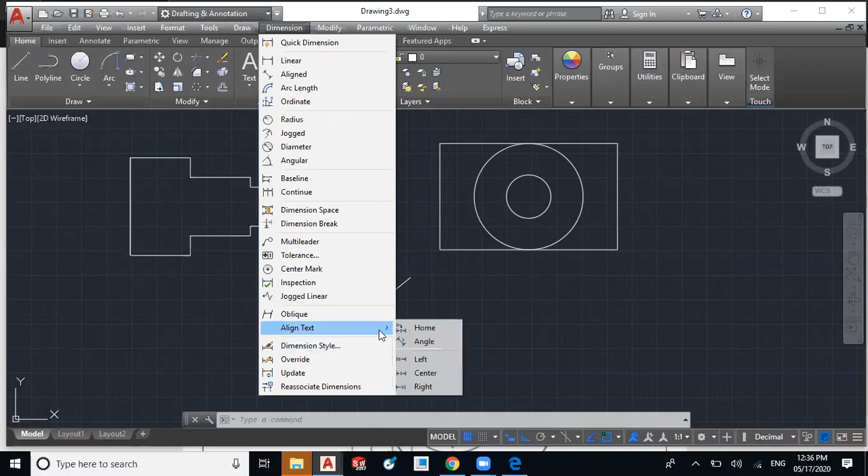You can directly jump to another scale, like you cannot start from 0, but you can start from 10, 20, like that. That is the jog. It is jog in the linear and jog in the circular dimension. Two options are there. Then oblique dimension is there, and then align text is there. You can use home method. You can give align text at angle, left, center, and right. These are the aligning methods for the dimension text.

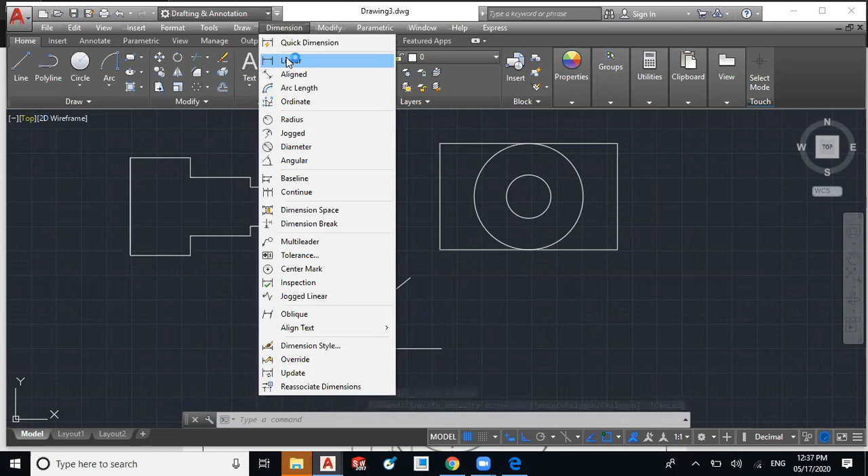There is the dimension style option, which is used to edit the dimensions or edit the style of the dimension. So we'll see that afterward. First, we'll select the linear dimension. To give the straight line dimension, we use linear dimension. So select the linear. Then we have to select the first point of the line, then end point of that line. We have to drag out at the specific distance and left click. So we have given the dimension to the first edge of that rectangle.

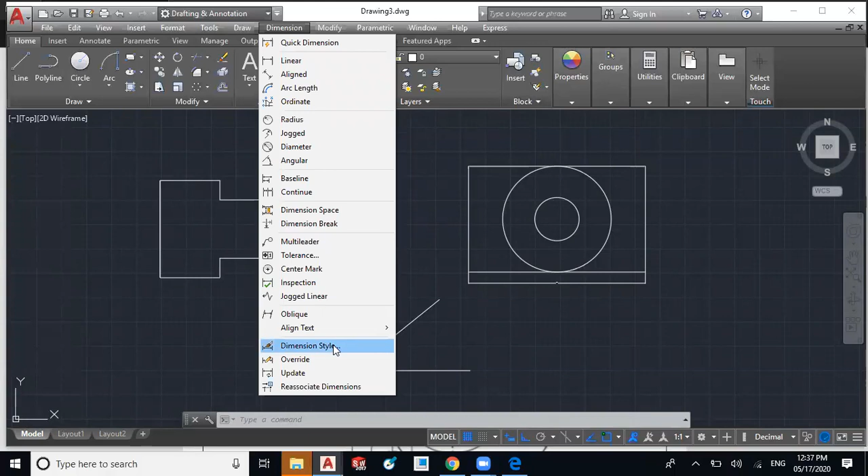Now you can see there is small dimension. You can see text height is very small. So we have to change this text height. Before giving other dimension, we will change this. So we have to select the dimension again, and we have to select the dimension style option. Okay, then dimension style manager window will be open. To open this window, we are having shortcut, that is DS.

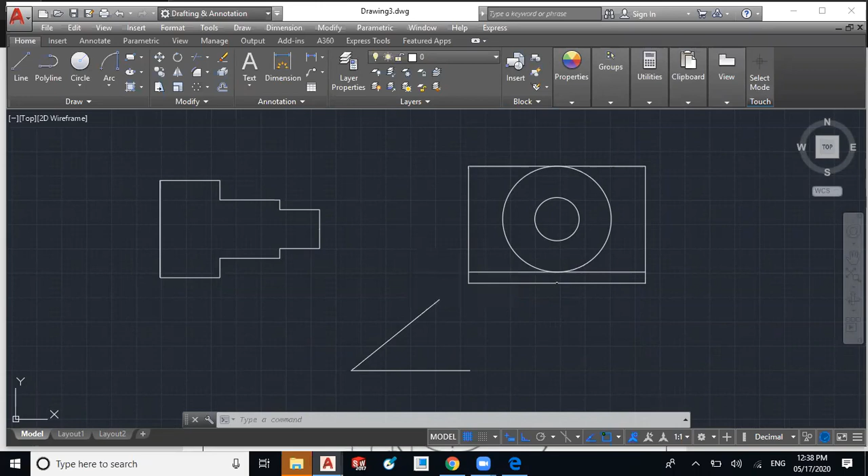Just we have to type the DS, and you will get the option dimension style. So select it and open it. Okay, so you will get the dimension style manager. Sorry, DST is the shortcut for it, and DS for drafting settings. You can type dimstyle. Dimstyle is the shortcut for it. So you have to use the dimstyle shortcut, press enter, then okay, dimstyle, and you will get the dimension style manager.

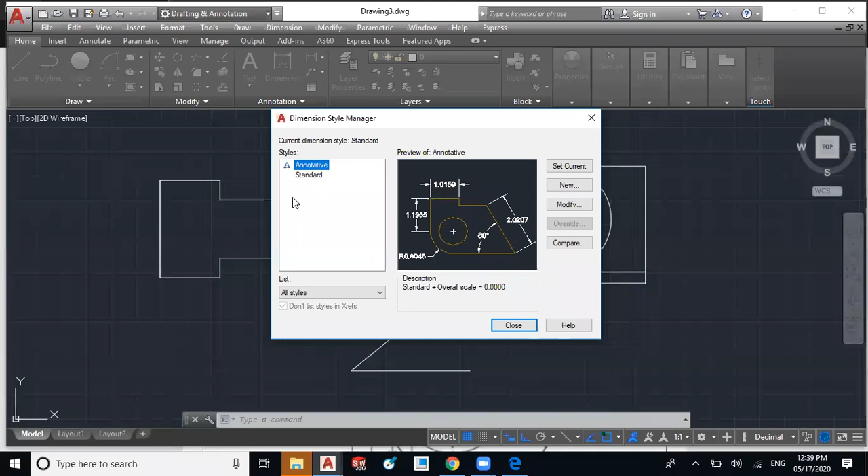And from it you have to select the standard option, or you can select the annotative also. So dimension will be annotative. For that you have to select the annotative option. So we are using standard dimension here. So I will select this standard, and I'll select the modify option to make the changes in the settings. So there is the modify dimension style standard dialog box, and we are having these tabs: lines, symbols, text, fit, primary units, alternate units, and tolerances.

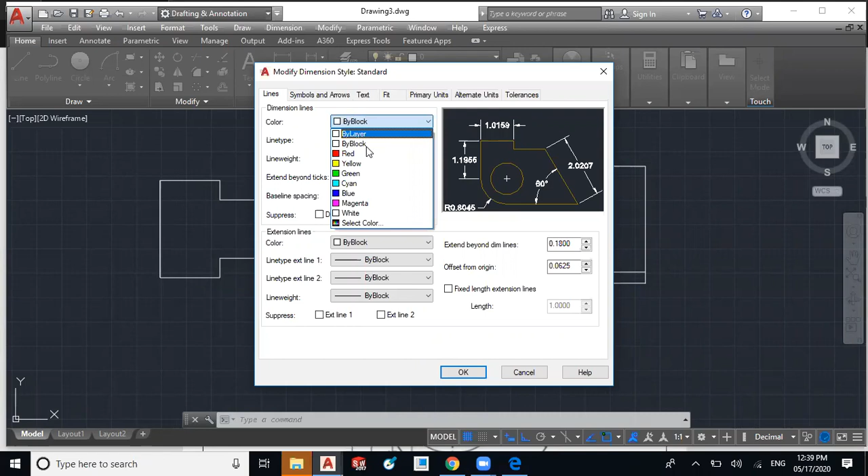So there are some lines, the line types. You can select it by layer, because we are using the line properties with the layer. So you have to select all the properties of line using the layer. So I am going to change this setting as by layer, and you can set the baseline spacing, the spacing between line and this baseline. So there is one baseline spacing. So there is no need to change all the settings.

You have to set the dimension lines as ByLayer, and extension line also ByLayer. So extension line is this one, this extended line, and dimension line is the one with the arrowhead.

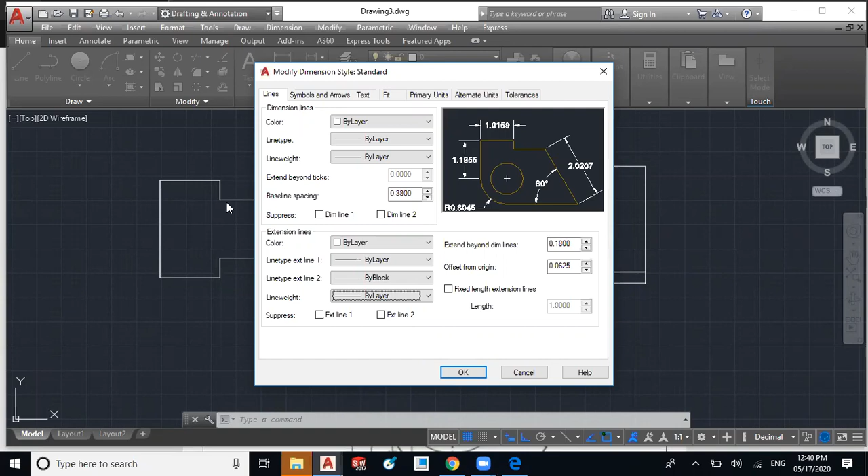So next tab is Symbols and Arrows. So you have to select the arrowhead as Closed Filled. There are different types of arrowhead. So we are using Closed Filled type, that is default. The leader arrowhead also will be Closed Filled, and the second arrowhead also Closed Filled. So we are using Closed Filled arrowhead.

Now arrowhead size. Generally in the drawing we use arrowhead size 1:3. If length is 3, then arrowhead width should be 1. So 1:3 is the arrowhead size, but you can use the default arrowhead size in this template. You can use a center mark.

Then arc length symbol you can use from these three types. You can use none, or you can use preceding dimension text also. You can use radius jog at 45 degrees, and break size you can use anything. So there is no need to change this text height and break size. You just use default text height.

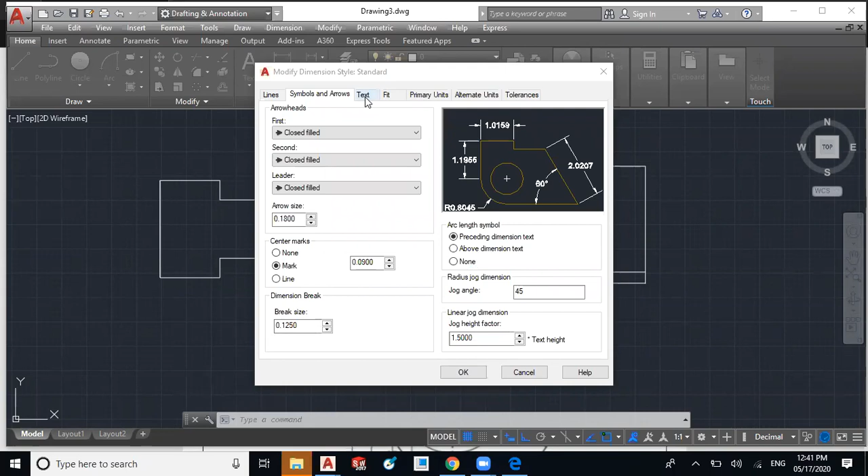Then another tab we are having is Text. So we are going to use text appearance as Standard. The text color ByLayer, and fill color none. Text height you should use default, because I am going to tell you the direct scale method. So keep this text height as default. You can increase it, but

use the default style. So now text placement is there: vertically centered, horizontally centered, and view direction. It should be readable from left to right. This standard method we are going to use: centered, and left to right reading method.

And for text alignment there are types: horizontal, aligned with the dimension line, and ISO standard. You can use any option from this. I have kept it as horizontal, which is the default reading method, left to right. So I have selected horizontal method.

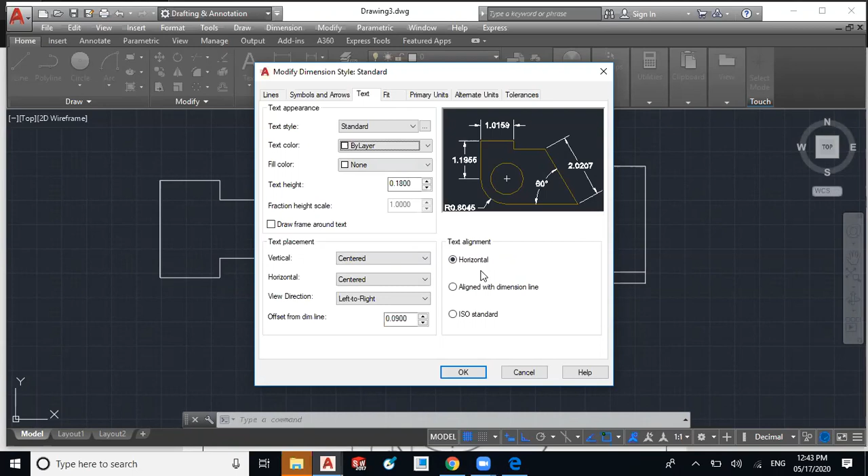Then another option is Fit. So this option we are going to use to scale the dimensions. Other options you have to keep default. Just you have to select this use overall scale option. It is annotative, or use overall scale method for the standards, and select this checkbox, draw dim line between extension lines. So it will create dimension line for circular objects.

Now we are going to increase the scale. So according to the length of the drawing, you have to use the scaling factor. I'm going to use the scaling factor for this drawing as 10. So it will be increased. The dimension arrowhead as well as dimension text, it will increase. So these settings we have to do in the Fit.

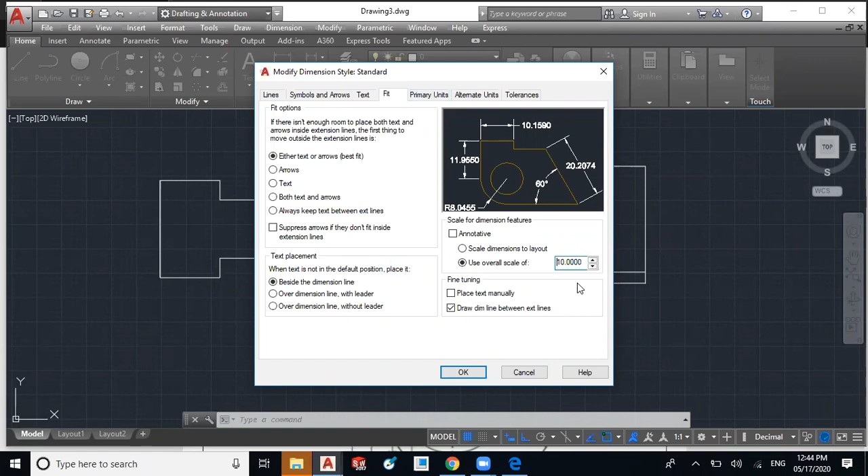Now we are having Primary Units. The linear dimensions unit format is decimal, and for the precision there is no decimal point, so we will use 0, and we will minimize the space required for the text of the dimensions. So we have done this. In the primary units, we have just changed the precision. There is no need to use the alternate units.

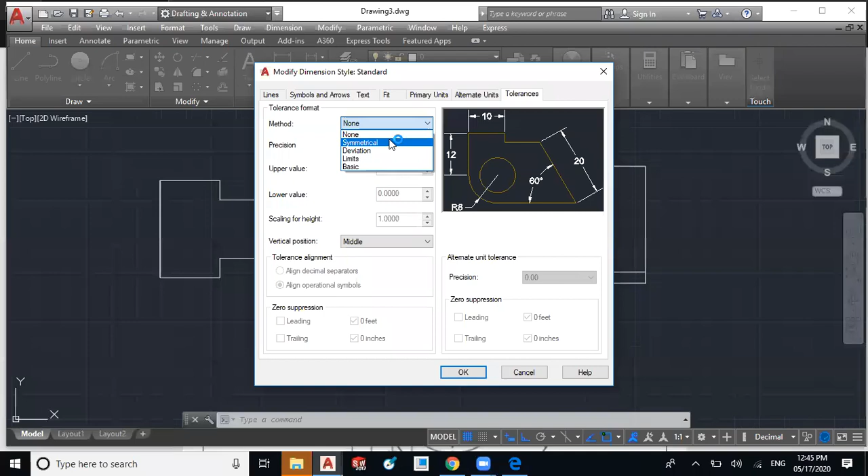Now we'll see the tolerances. So tolerance method, you have to select. If there are tolerances, then you can use the tolerance method. If you are using the limit method, then you have to specify the upper limit and lower limit. Symmetrical, then you can use the symmetrical tolerance format. So I will use the limit method. Generally, limit method is there.

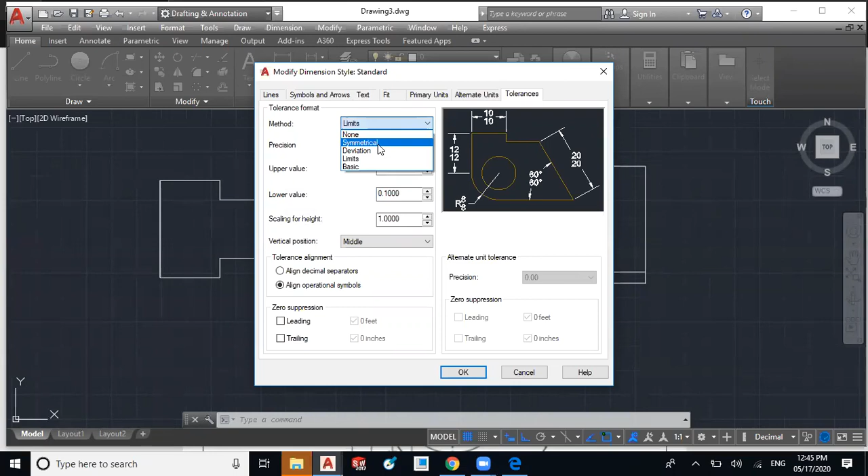So we will use the limit method, and we have to define the upper limit with 0.1, and 0.1 on the lower side too. So you can use symmetrical too here, because both are having 0.1.

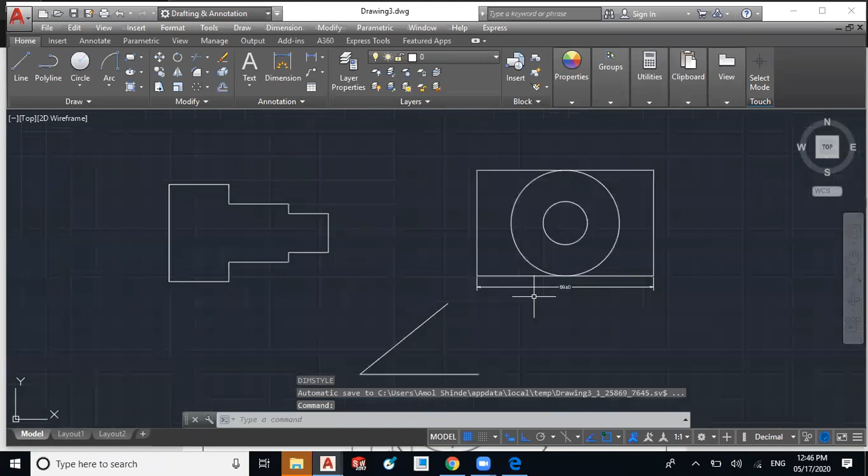Then to apply all the changes, you have to click on just OK, and to apply the changes, close this window. You can see your dimension style increase a little bit. Again, we will increase the scaling factor from the fit to get a clear dimension. Select the fit and just increase this factor, suppose 20. Enter and close this.

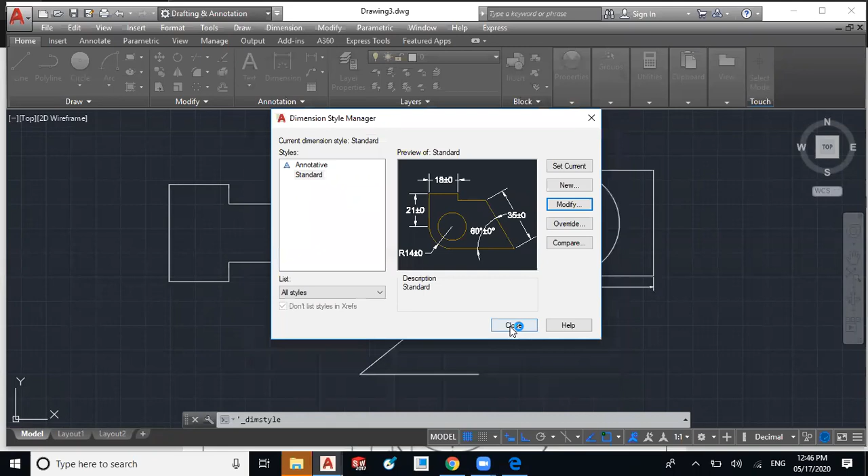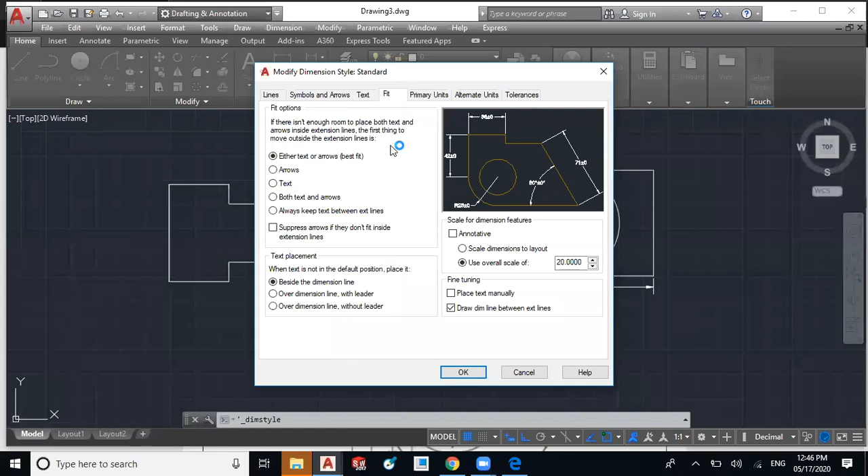Okay, now it is clearly visible with the tolerance value also. We have selected precision at 0, so it is showing limits also in 0. So again, dimension style, modify, and set the primary unit precision to 0.0. Then it will show you the values in points. Okay, the 88.7 is the length, and limit upper and lower is 0.1. That is the tolerance value. I will give another dimension to this rectangle.

First point, last point, drag out and left click. You have to specify the position of that dimension line, and it will show the position. Okay, this is the length of this vertical side.

Now I will give the dimension to the circle by using radius. So I have selected the radius. I have to use the radius dimension, radius type of the dimension, and then select the circumference of the circle or circumference of the arc. Then you drag out and left click. Okay, position it at a proper size.

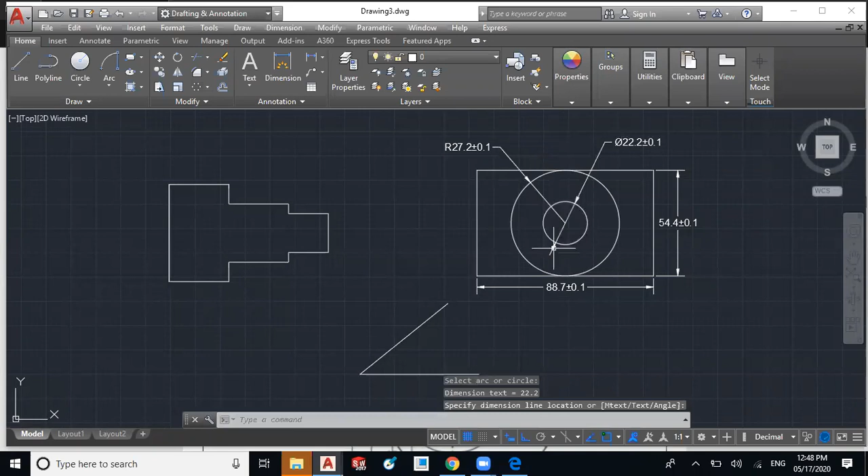Again, we can use the diameter also. So select the diameter and select this inner circle, drag out and left click. So we have created radius and diameter, both the dimensions, and these dimensions are clearly visible. It is marking with the tolerances, because we have given the tolerance value.

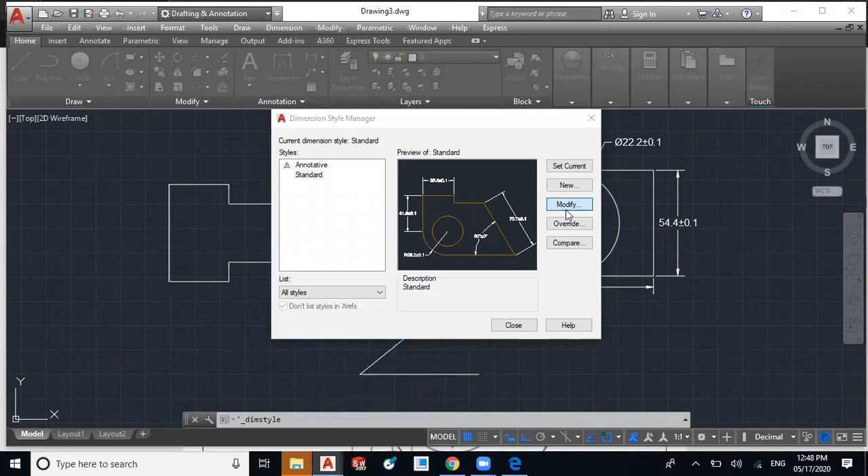If you want to remove the tolerances, then we have to select the dimension style, modify it, and just go to the tolerance and select none in the tolerances. Apply the changes, OK, close. Okay, then tolerances will be removed. We have seen both of these. We have another: why tolerances are used.

Tolerances are the limits given to the manufacturer. There may be error in the objects, so allowable limits are given to the manufacturer. It is not possible to make a shaft of exact size. Suppose I have given the diameter of 22, I have to make a shaft of 22 diameter. Then it is not possible for the manufacturer. There may be a small error, so the allowable error given to the manufacturer, that is the tolerance.

Okay, that is in the manufacturing drawings. These tolerance limit values are getting covered. So now we have to give the angular dimension. So we are having angular dimension. Select angular. Select this first edge, second edge. Sorry, second edge. Drag in between and left click. So you will get the angle between these two edges.

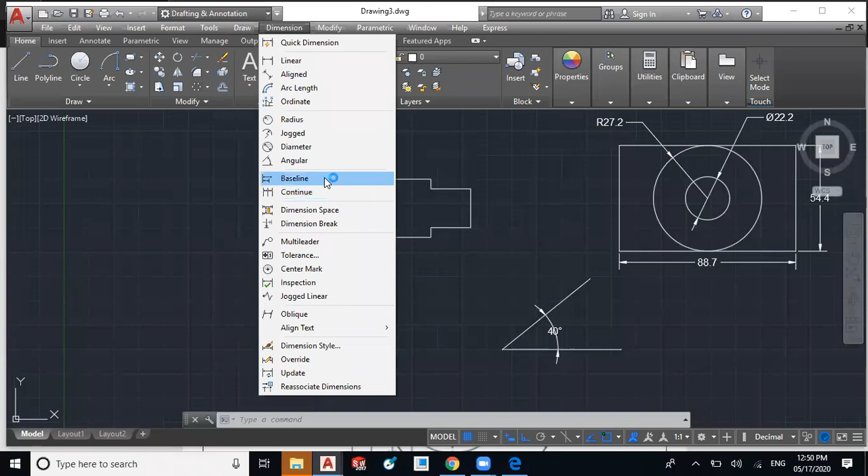Now we are going to use types of the dimension, that is baseline and continue. There are two types. You can give the dimension from the reference of baseline, and you can create continue dimensions. Whenever you are having less space to give the dimension, you use the continue, and if you want to give the dimension from the reference, then you have to use this baseline. So we'll see one by one.

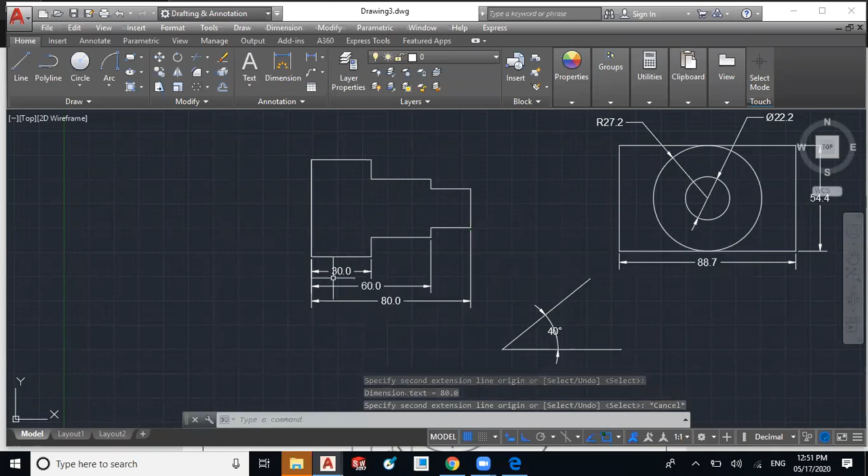To use both types, you have to create one reference dimension by using linear. So I will create the first dimension or reference dimension by using linear. Now I can create a dimension by using the two options, base and continue. So I will create with the baseline. Automatically it will start from the base reference, and I have to select the next points to create the dimension, then escape after completion. So you can create this dimension from the base reference line: 30, 60 and 80.

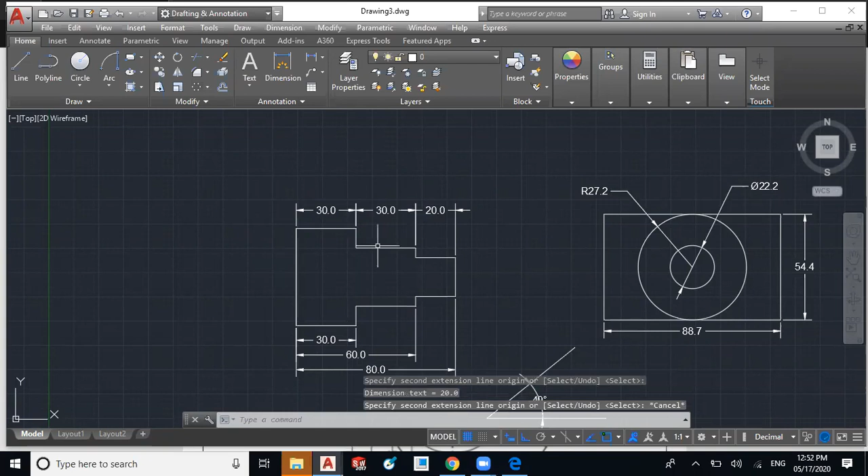Okay, for another type I will create another reference dimension with the linear. So create a linear dimension, drag out. Now I want this in a continuous line, so I will use the dimension and I'll use the continue type. So it will create a continuous dimension in the line of the previous one. So I have created this continue type: 30, 30 and 20. Okay, so these are the types of dimension and how to edit the dimension style.

Yeah, we have given the dimension to this and I have shown you how to modify it, how to set the fit scaling.